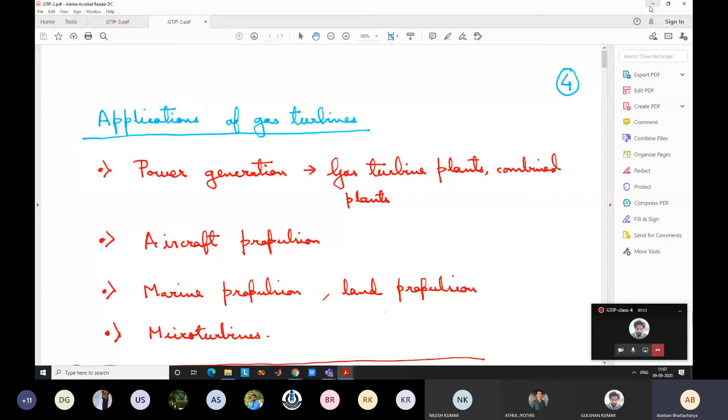So it means that our chance of coming to campus is less this year. At least for now, I am not sure about the next semester. My guess is, or not a guess, most probably, this entire semester is supposed to be online. I think the exams are in December, mid-December or something like that. After that, a decision will be taken. I think results will be out in January, so after that, a decision will be taken based on the situation.

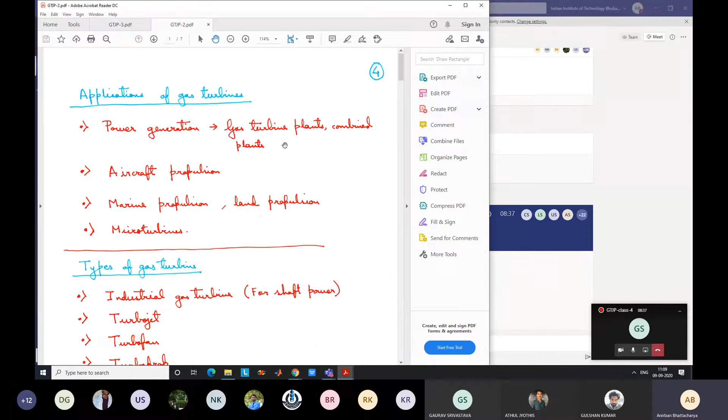I don't know about the lab component. I guess it is going on in online mode, but I'm not sure whether some part of the lab will be done here or not. Last year, students had to manage with only online mode, which is not ideal for lab classes. For our theory classes, it is okay. The only problem is the online exams, which are not useful. But if there is no other option, we also have to do it like that.

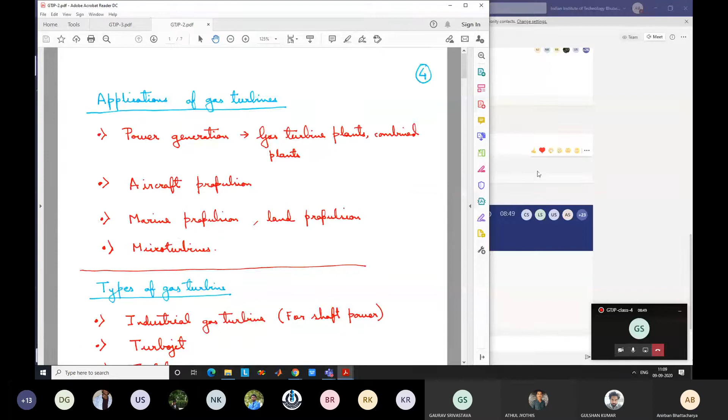Sir, about the recorded lectures. Yes, I have to manage some time to send them. Could you download them yourself? Are you able to download? Have you checked? Sir, we are able to download, but the files are too big. The same thing will happen in my case also. When I send you the link, that issue will be there, right? If you want to see the video lectures, you will need some data.

Sir, you could upload it to YouTube, then they can stream it online. You can obviously stream it online, and I will upload it to YouTube, but you will still require data for watching on YouTube. But that will be lesser than downloading, sir. Okay, because the file sizes are not so large. One hour of lecture is around 150 MB only, quite optimized. Two hours are around 200-300 MB. But anyway, I will upload because you can then watch at lower resolutions also.

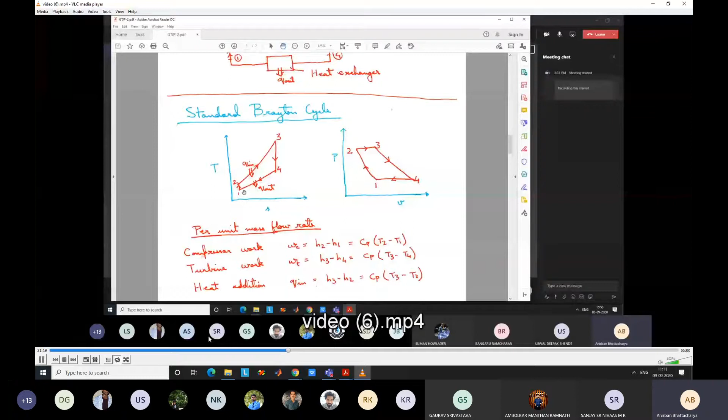This is from the previous class, so I have the videos downloaded. I will upload them. I could not prioritize this over other work. I should create an account. I don't want to do it from my official account, because I don't know the institute policy on this. Better to do it from another account.

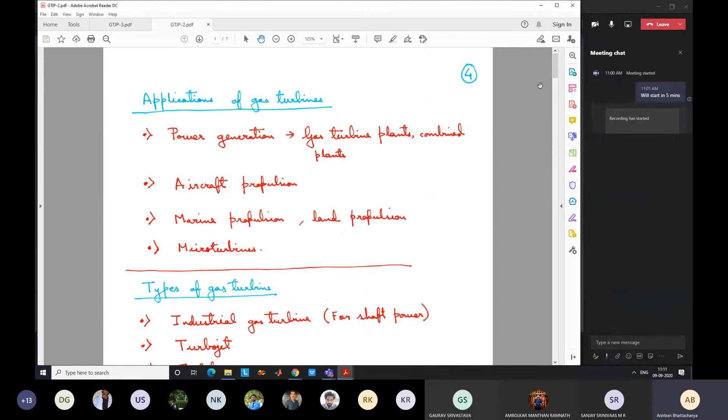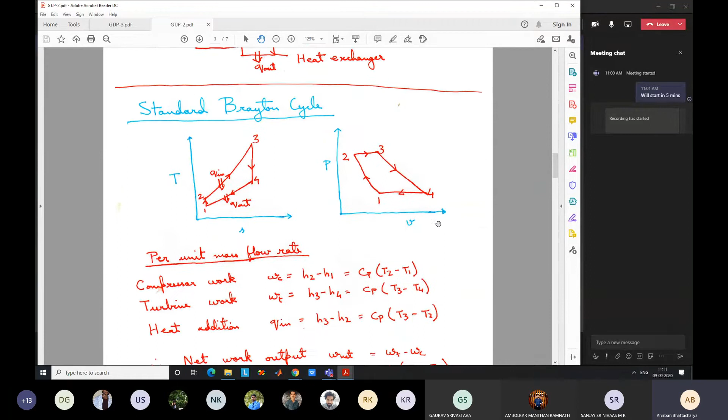So how much had we discussed? I think we were towards the end of the simple Brayton cycle. I will quickly recap once. We were discussing the standard Brayton cycle, which is the most basic cycle for gas turbine applications. We have discussed that in actual gas turbines, in all cases, the working fluid is air at the inlet and it is available in unlimited quantity.

The cycles are open cycles, not closed cycles, because you just bring in more and more air and use it for combusting the fuel, and then pass the hot mixture to the turbine for expansion and get work out of the turbine. Then, depending on the type of gas turbine, we either design the turbine in such a way that the full work is required for running the compressor.

So in that case, the only requirement of the turbine is running the compressor, and the rest of the fluid also has a lot of enthalpy after the turbine, which is used in the nozzle for generating velocity and used for jet propulsion purposes. And we have discussed that for industrial gas turbines, the turbines are larger in size, so that only part of the work is used up by the compressor. The rest of the work is transferred by the same shaft to a generator and used for generating power.

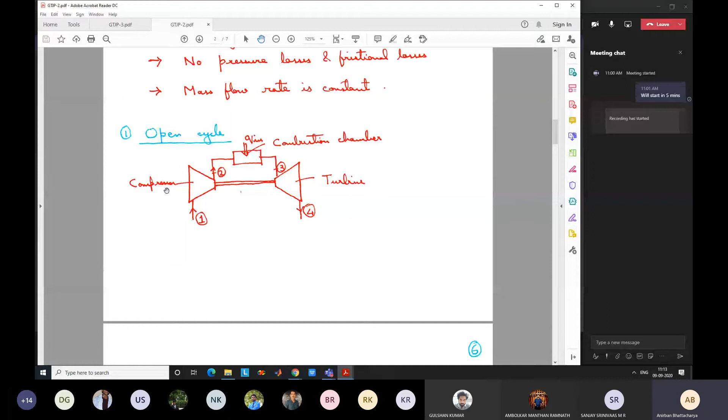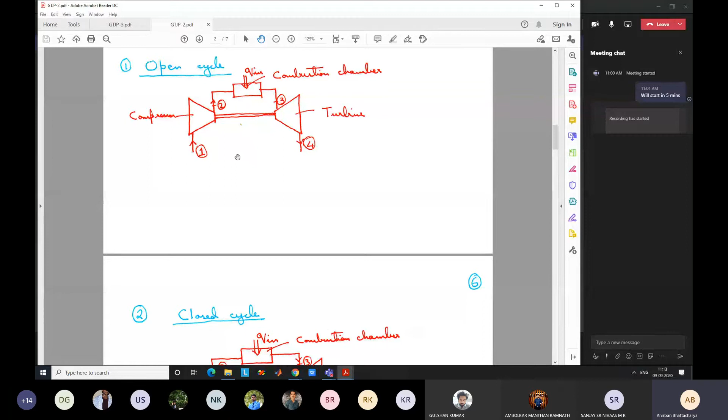And to study this cycle, actually we close this cycle, this 4-to-1 point, using a heat exchanger. Basically, the pressure at 4 and pressure at 1 are the same. Both are at atmospheric pressure, at the local atmospheric pressure, at the point where the engine is operating. So for closing the cycle, the only difference at 4 and 1 is that the temperature at 4 is quite high as compared to 1. So if you have an artificial heat transfer process here, you can close the cycle. So as a result, we close the cycle using a heat exchanger artificially, as if the temperature goes down from 4 to 1.

And after closing the cycle, the 4 processes, if we put them together, give us the standard Brayton cycle. That also we have discussed. And this is how the standard Brayton cycle looks. We have 4 processes: 2 isentropic processes, 1 to 2, which is the compression in the compressor, and 3 to 4, the isentropic expansion in the turbine. And 2 constant pressure processes. From 2 to 3, we have the constant pressure heat addition, which occurs in the combustion chamber or burner. And from 4 to 1 is the constant pressure heat removal, which occurs in the heat exchanger.

If it is an open cycle, we will only have 1 to 2, 2 to 3, and 3 to 4, and this cycle will stop there. This point 4, as you can see, is much above the point 1, which means that it has a higher temperature, although they are on the same constant pressure line. These 2 lines are the constant pressure lines.

The same thing can be drawn in the PV diagram also, and we have seen how it looks. So 1 to 2 is the isentropic compression, and pressure goes up. This is an isentropic line. 2 to 3 is a constant pressure line, so pressure remains the same. Because the temperature increases, the volume also increases proportionally. And 3 to 4 is isentropic expansion, and 4 to 1 is again constant pressure heat removal. Again, because the pressure remains the same but the temperature changes, the specific volume also changes proportionally, because PV is proportional to RT.

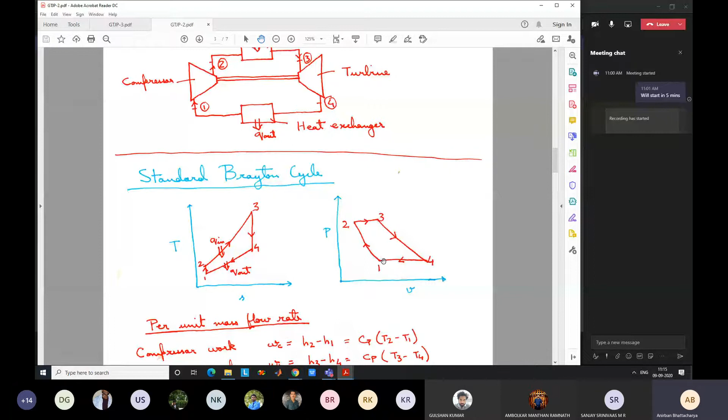And we have seen how to calculate the net work output. These are very trivial. All of you have done this in your previous courses, so just to get you a start, we are going through this again. So W net is W turbine, the work output of the turbine, minus the work of the compressor. Using ideal gas, assuming constant Cp, we can write in this form: Cp (T3 minus T4) minus Cp (T2 minus T1). Please remember that there may be a lag between my voice and the cursor movement that you see on your screen. There is sometimes a big lag also. So I may be showing somewhere on the screen, but you may see something else. So you have to bear with that.

Then we have calculated the efficiency, where efficiency is W net by Q in, a very standard definition. All of you have used this in thermodynamics for any heat cycle. This is the definition, and by suitable simplification, we found that ultimately the efficiency can be written only in terms of the pressure ratio R, where R is P2 by P1, the pressure ratio across the compressor, and this is the same as P3 by P4, the pressure ratio across the turbine.

So remember, we are studying shaft power cycles right now, or industrial gas turbines. So the pressure ratio across the turbine is the same as the pressure ratio across the compressor. This will not be the case for jet engines when we study them later. The compressor pressure ratio will be higher and the turbine pressure ratio will be lower, because the entire expansion will not be done in the turbine. Some of the expansion will be done in the nozzle. But in this case, both the pressure ratios are the same for the compressor and the turbine.

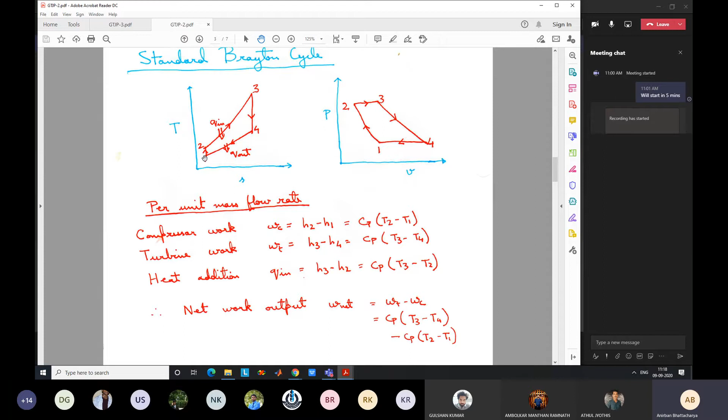Obviously, at a pressure ratio of 1, what happens? Pressure ratio of 1 means that there is no difference between 1 and 2. There is no compression. So basically, there is no cycle at all. So no work output. Okay. And from there, it keeps on increasing, slowly. For very large values of R, it will go towards 1, but still it will increase very slowly. Okay. It can never reach 1, of course, that is true.

And typical values of R nowadays are around 20. Initial gas turbines had very low pressure ratios. Initial jet propulsion engines had 2, 3, 4 like that. But nowadays, typically, it can go much higher.

And we have seen towards the end of the previous class also that the second important parameter for analyzing the cycle is the non-dimensional net specific work output. Non-dimensional, why? Because we are dividing the work by a similar quantity, C_p T1, the inlet enthalpy. So it makes this non-dimensional. And net work output, because it is the net work, turbine work minus compressor work, and specific work output because it is per unit mass flow rate.

Okay, so it is non-dimensional net specific work output. So this we have seen that we can write it as a relation which looks like this: T (1 minus 1/C) minus (C minus 1) where T is the temperature ratio. T is known as the temperature ratio, T3 by T1. Again, I will go back to the cycle. T3 is the maximum temperature in the cycle. T1 is the minimum temperature in the cycle.

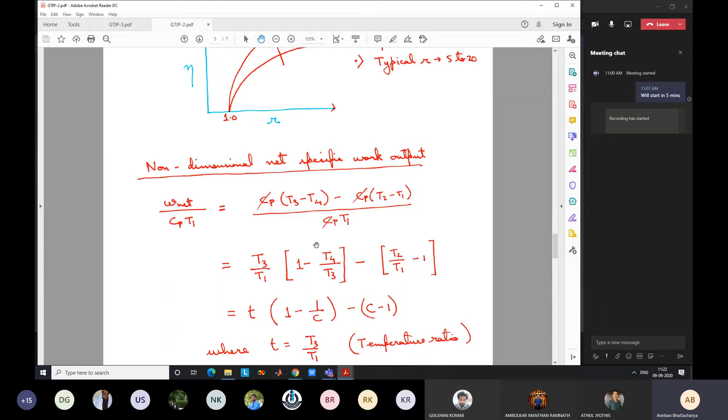This is important because, keeping the efficiency same, or for similar efficiency, if you have more specific work output, you need less mass flow rate of air for generating the same amount of total power. Okay, if the specific work output is more, for the same total work output, you will need less mass flow rate, and as a result, because all the components scale with the mass flow rate of air, all the component sizes will be much reduced, like the compressor's diameter, turbine diameter, everything will be reduced, combustion chamber sizes, and it will be lightweight. This is very important for jet propulsion cycles, because weight becomes a very important criterion in aviation. Okay, so you want to reduce the weight as much as possible.

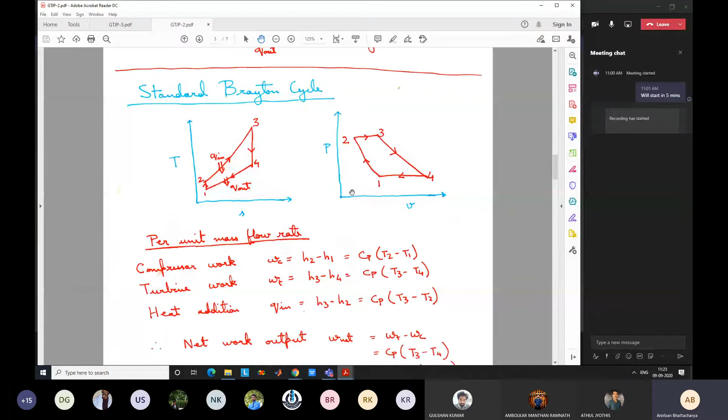So I hope up to this point everything was clear in the previous class. We have also seen one example calculation of the point at which the net work output goes to 0 for the T equal to 2 case, and we found that this happens when R is equal to 11.31. And remember that for R equal to 1, anyway it is 0 because the work output is 0 at that point. Okay, the cycle does not exist.

Then we have a very long, constant pressure heat addition process, because we have to go till T3 temperature. So from T2 to T3 is a very long distance. And again, the pressure ratio across the turbine is very small because R is very small. So small pressure ratio across the turbine, and then again a very large heat rejection process. So this is the shape for R very near to 1 or a very small value of R. Okay, and you can see that the cycle area actually gives us the net work output, net heat addition, which is also equal to net work output. You can see that the net work output will be quite low. And in the limit that R goes to 1, we will see that T1 and T2 coincide and the cycle basically becomes just like a line. Okay, so you don't have any work output.

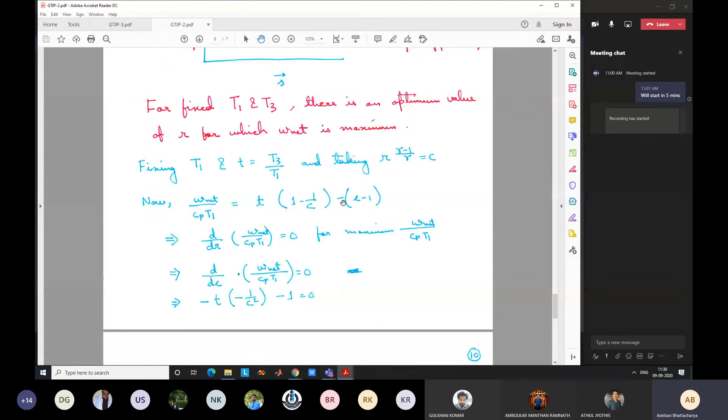If you do that, the first term goes to 0. The second term, minus T by C, differentiating with respect to C, gives minus T minus 1 by C square. The third term gives minus 1, and the final term is 0, constant. So you get the equation T by C square minus 1 equal to 0, from which C is equal to root over T.

C is equal to root over T, and remembering that C is R to the power gamma minus 1 by gamma, we can write R is equal to T3 by T1 to the power gamma by 2 gamma minus 1. So this is the optimum value of pressure ratio for which we get the maximum work output.

The physical meaning of this will be clear if we try to find the optimum temperature instead of optimum pressure ratio. Remember C is equal to root T, or C square is equal to T. What is C? C is the temperature ratio T2 by T1. T2 by T1 is R to the power gamma minus 1 by gamma, which is equal to C.

Similarly, C is also equal to T3 by T4. So temperature ratio across the compressor and temperature ratio across the turbine are both equal to C. Coming back to this expression, C square we can write as T2 by T1 into T3 by T4, and small t is the temperature ratio T3 by T1. If you cancel out T3 and T1, you are left with T2 equal to T4.

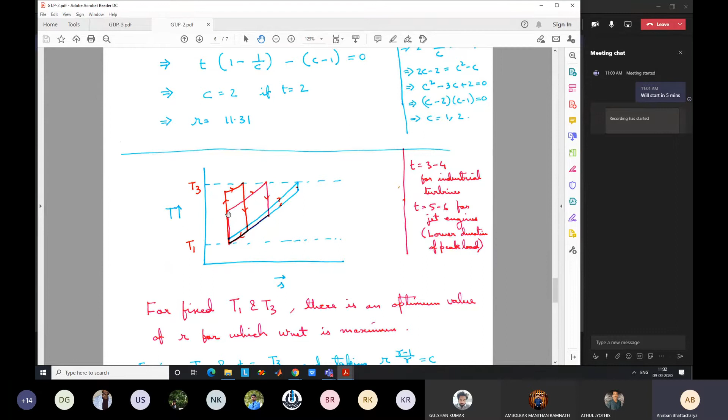So at the optimum condition, in terms of maximizing work output, we see that the maximum work output occurs when T2 is equal to T4 - this point and this point are at the same height. If we go back to the cycle T-S diagram, if points 2 and 4 are at the same height, meaning the same temperature, you get the maximum work output from this cycle for a given value of T.

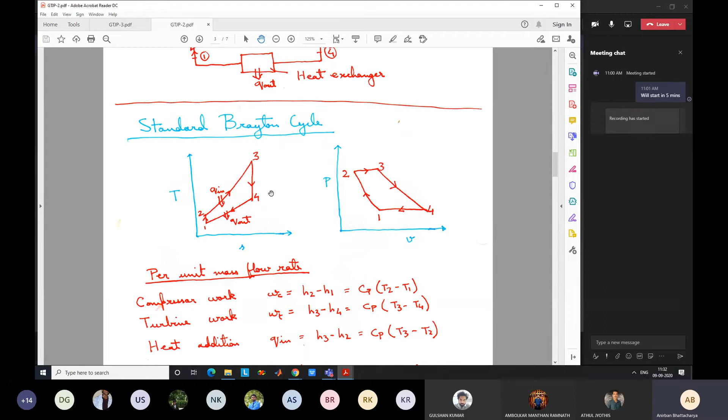Okay. So also it means that from this where is it? No, it's fine. Okay. So this is

It does not mean we have to operate at this point, because efficiency is also important, and efficiency at this point is not maximum - efficiency will increase with increasing value of R. But if we want to maximize the work output, we have to go with this condition.

So any questions up to this? This is just about the simple cycle. Then we will go with some modification of the cycle - some modification of the simple gas turbine cycle, which is also called the Brayton cycle.

So the first modification is regeneration. We want to increase two things: one is the efficiency of the cycle, second is the net work output from the cycle, net specific work output. These are the two things we want to increase. Regeneration is a process which can be used for increasing the efficiency - it will not help in increasing the work output, but it can cause an increase in efficiency.

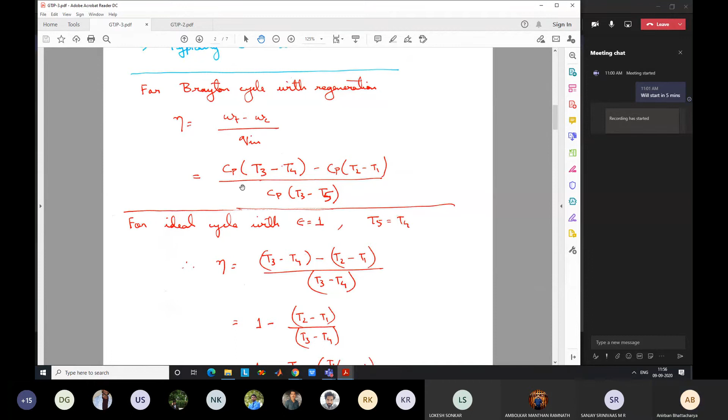So now eta is equal to 1 minus (T2 minus T1) by (T3 minus T4). You can simplify this. Take T1 and T3 out, so you get T2 by T1 minus 1 in the numerator, and in the denominator, 1 minus T4 by T3. What is T2 by T1? It is the temperature ratio across the compressor, which is R to the power gamma minus 1 by gamma. So R to the power gamma minus 1 by gamma is C.

We have discussed this, so this is C minus 1. And what is T4 by T3? Remember T3 by T4 is R to the power gamma minus 1 by gamma, the temperature change across the turbine. So T4 by T3 is 1 by R to the power gamma minus 1 by gamma, which is 1 by C. If you take C as common from the numerator, both numerator and denominator cancel each other, and you're left with 1 minus C by T. In other words, efficiency equals 1 minus R to the power (gamma minus 1 by gamma) by temperature ratio T.

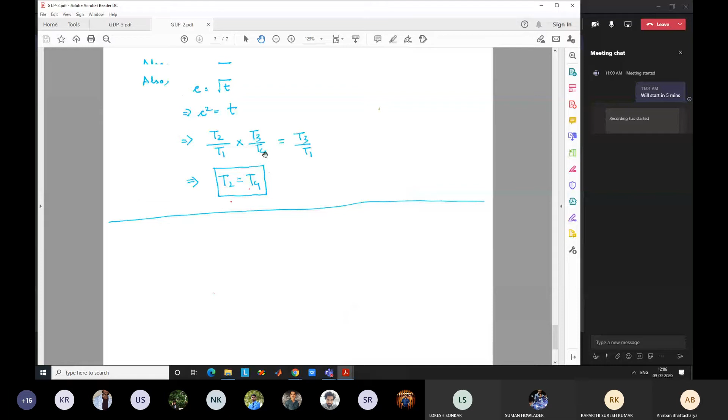Someone was replying, right? When we have high pressure ratios, T2 reaches higher than T4. Yes, correct. When T2 is higher than T4, if we have a high pressure ratio and keep on increasing it, T2 will keep on increasing, as we have seen in the previous case. And at some point, keeping the temperature ratio T3 by T1 constant, if we keep on increasing the pressure ratio, T2 will go beyond T4. At that point, you cannot effectively transfer the heat, because now we were trying to transfer heat from this exhaust gas to this part.

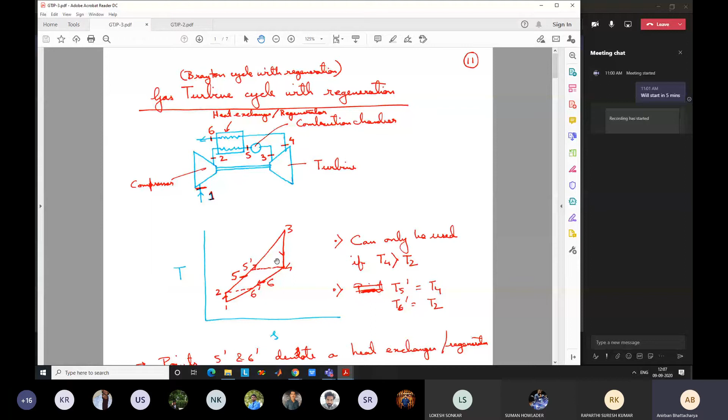But for some part of the heat exchanger, the opposite thing will happen, meaning the heat flow direction will become opposite. It will actually negatively affect the heat exchange process, so the heat exchanger is not effective. So the condition for a regenerator to be used is that T4 should always be higher than T2, and the limiting case is T4 equal to T2. If T4 is not higher than T2, we cannot use a regenerator. This is clear from this diagram, and this is also why this effect has happened here.

It should be less than the optimum pressure ratio for a regeneration process. Optimum meaning in terms of maximum work output. Yes. If you want to increase the efficiency, work output is not the only important parameter, right? Efficiency is also very important. Yes, it has to be below the maximum work output limit.

What is happening to the work output in this cycle compared to the simple Brayton cycle? Is it changing? It will be lesser now, because T2 and T4 are far apart, so specific work output will be lesser. Why is it lesser? Sir, work output will be maximum when T2 and T4 are at the same level, right? But T2 and T4 can't be at the same level — not in the optimum case. I am saying that for the exact same temperature and pressure ratio, say somewhere around here.

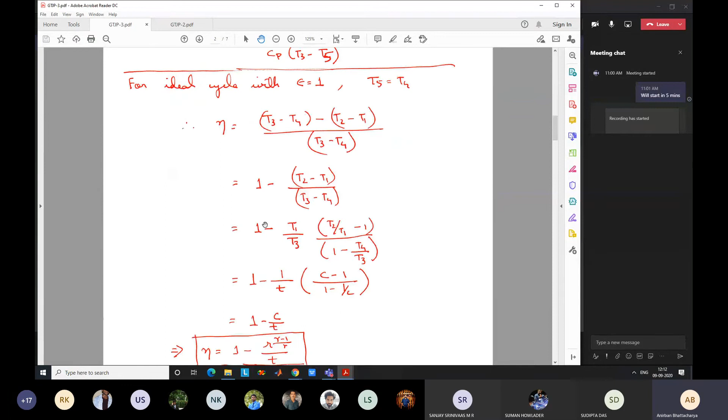We will have a higher scope of regeneration if the temperature ratio increases — regeneration is more effective when the difference between T4 and T2 is higher. I hope this is very clear. So if you keep increasing the difference between T4 and T2, you can have more effective regeneration. One way to do it is to increase the temperature ratio by improving materials, for a fixed pressure ratio — that gives more scope of regeneration. That's why our earlier result showed more T gives more efficiency, for a fixed R. And the other case we've already seen: if we keep T fixed, meaning T3 by T1 fixed, and keep increasing R, then T2 increases, the difference between T4 and T2 decreases, and we get less scope for regeneration.

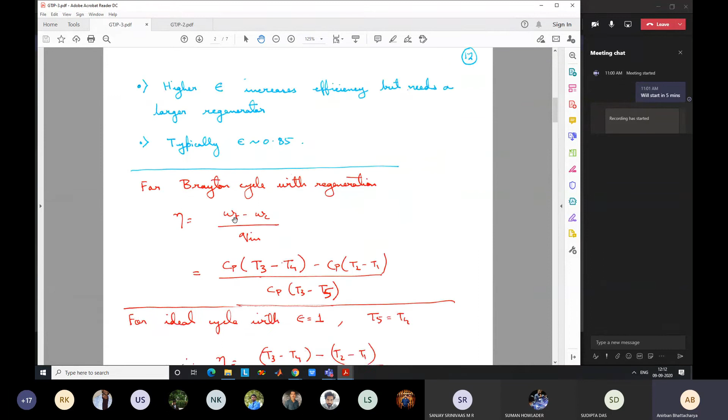Okay, so increasing R decreases the scope of regeneration. So that's why these two conditions are present. Okay, how T and R affect.

And I have discussed that at R equal to 1, eta is equal to 1 minus 1 by T. This is similar to the Carnot cycle efficiency. Okay, 1 minus 1 by T is 1 minus T1 by T3. T1 is the minimum temperature in the cycle. T3 is the maximum temperature in the cycle. So at the limiting case of R equal to 1, we get 1 minus T min by T max, which is the Carnot cycle efficiency for a given temperature range.

Obviously, we cannot achieve that because in that case there will be no work output. Pressure ratio is 1, so no work output. So the theoretical limit of a regenerative cycle is that we get Carnot cycle efficiency. So we want to find out what this is. I have described this, and you have taken my word that at these points T2 equals T4. But we want to mathematically see that yes, T2 is equal to T4 at that point.

Okay. So say C is equal to root T. Then T is C square, so eta can be written as, so what is eta? Eta was 1 minus C by T. So I can write this as 1 minus C by C square, which is 1 minus 1 by C, which is 1 minus 1 by R to the power (gamma minus 1) by gamma. What is this value? This is equal to the simple Brayton cycle efficiency. So for C equal to root T, we get the simple Brayton cycle efficiency.

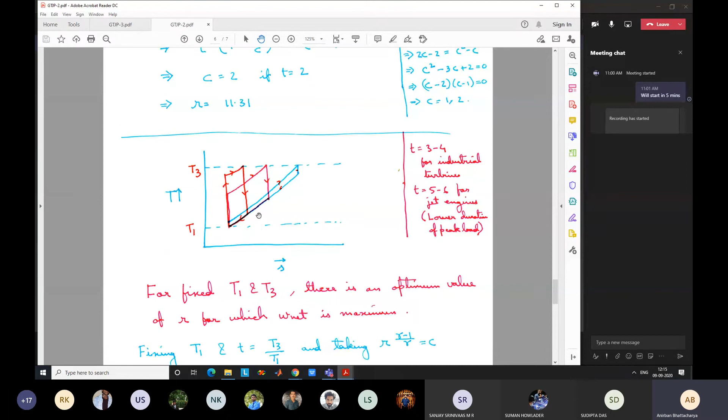We have seen, let me just keep it here. This scrolling is difficult for you, I understand. I quickly scroll. We have limited space here. We had seen for the simple Brayton cycle today at the beginning of the class that for C equal to root T, the condition T2 equal to T4 is satisfied. Okay. So C equal to root T means T2 equal to T4. So the same thing we are seeing here. So for C equal to root T, both the efficiencies become equal. It means that for T2 equal to T4, regenerative cycle efficiency is equal to simple Brayton cycle efficiency. It means that the blue line coincides with the red line.

And obviously, if you increase the value of T, C equal to root T occurs at a higher value of C, meaning at a higher pressure ratio. You can go to a higher pressure ratio for the regenerative cycle. Okay. Typically, what we do is operate at a point which is slightly below this maximum work output point. So the pressure ratio is slightly below this maximum work output point, the optimum point, so that we get good efficiency and good work output also.

And these are typically only done for industrial gas turbines. As we will discuss later, for jet engines, weight, the mass of the engine, is a very important factor. So we don't want to add additional components like regenerator, reheater, intercooler for aviation engines, because it will increase the weight and reduce the fuel economy. So in those cases, we just go with the simple Brayton cycle, but with a high temperature ratio, so that we directly get a high efficiency. Okay. But for industrial gas turbines, where weight is not a very big issue, we can add these extra things.

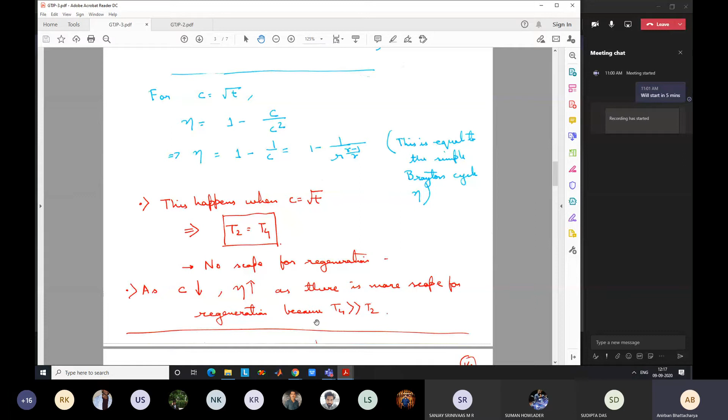Regeneration. So this happens when C is equal to root T and there is no scope for regeneration. Okay. And we have already discussed that as C is decreased, so as R is decreased, eta increases as there is more scope of regeneration, as T2 becomes much less than T4.

So finally, to summarize, for regeneration cycle, efficiency increases while net specific work output remains the same as compared to Brayton cycle. Any questions on regeneration cycle, ideal regeneration cycle? We will see real regeneration cycles later on, but now we are focusing on ideal cycles.

Sir, we need to practice numericals also for these questions. Correct, and I will also solve a few cases here, and I will give you some sets for solving. So, for example, I think I have sets already prepared.

So I will give you some assignment sets, and you can solve those problems. I will give you the solutions also, so that you don't have to bother with the marks. You just solve them on your own. Try to solve them without seeing the solution, and then compare with the solution.

And for each case, for this ideal cycles, a few problems, like this. But I can only give a few problems because I cannot generate a lot of problems, a very large amount of problems. It takes a lot of time.

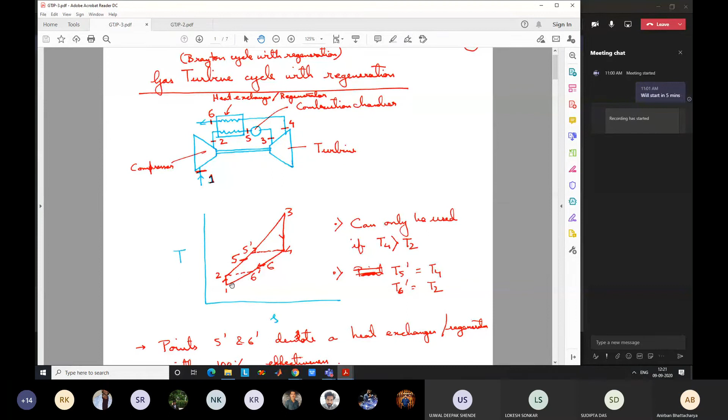At the limiting case when R is 1, you cannot draw the cycle. It's the theoretical limit of the efficiency, but the theoretical limit does not always need to go to infinity or 1. Here the theoretical limit is equal to the Carnot cycle efficiency. But actually what will happen—if R is 1, this line will just coincide, meaning 1 to 4 and 4 to 1. So there is no area inside the cycle.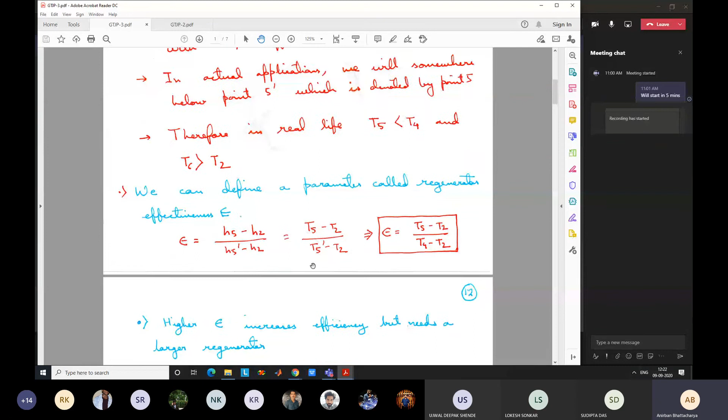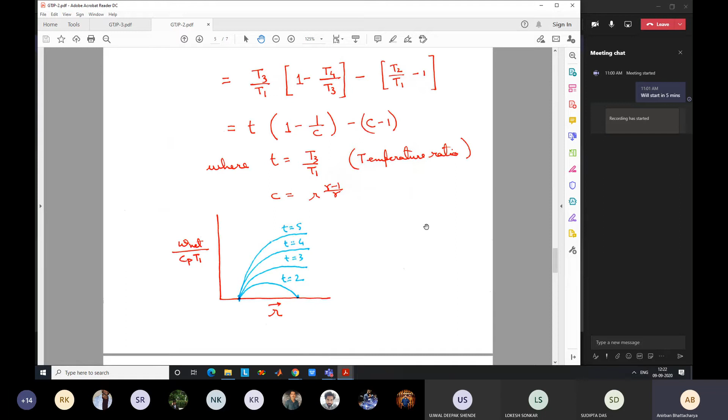So we cannot get any work output. Work output, the lines I have not shown you—I have only shown efficiency versus R. In the previous case for simple Brayton cycle, I have shown both types of lines. I have not shown the work output lines here because the work output lines are exactly the same as simple Brayton cycle, so these lines will coincide. There is no difference—for t equal to 2, 3, 4, 5, they will coincide.

Is it clear? Okay, sir. Yes, it's just a theoretical limit. Okay, in the actual case, that cycle cannot exist. But the theoretical limit is a finite value.

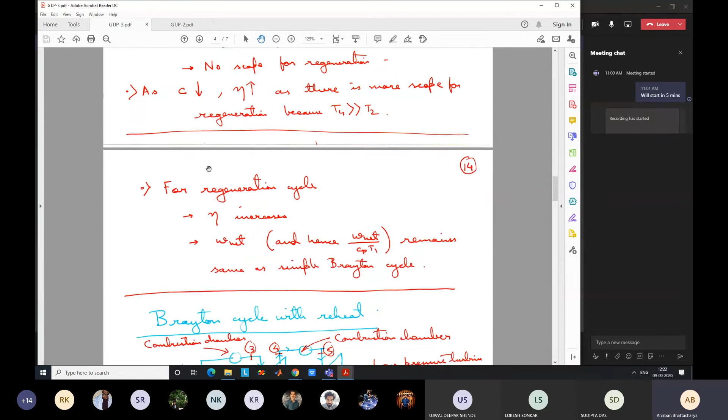It can happen in maths also. There are a lot of interesting things where limits go to a finite value, like there are some types of volumes—actually this is just not related to the course, but you can take a look, some interesting cases.

Sir, I think the expression of work will have some 0 by 0 form at R equal to 1, and that is not visible in the efficiency part. Yes, yes. You cannot use the normal equation at that point, at the limit—you cannot use net work output by heat input directly, but you have to take a limit. If you do the limit, you will see that you actually get some limiting value. Limit R tends to 1—if you find the limit, you will get a limiting value.

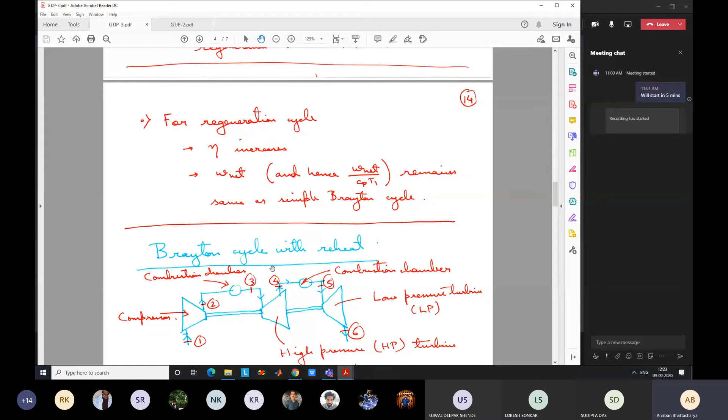See, remember that in maths there are a lot of examples with 0 by 0 limiting values, like some expressions, say sin x by x. If x goes to 0, sin x also goes to 0, but the limiting value does not go to 0. In a lot of cases the limiting value is a finite value, even if both the values go to 0. Similarly, in this case also it can happen. So limit sin x by x equals 1. In this case also something like that can happen, so you have to find the limit for that case.

So anyway, the next type of modification that was developed for the Brayton cycle, next not chronologically but in terms of studying, that we can consider is adding reheat. Again, the concept of reheat is not new to any of you. You have studied regeneration and reheat both in steam turbine cycles, in power plant engineering or steam turbines, depending on the courses that you had in undergraduate. So the same is the concept of reheat here also.

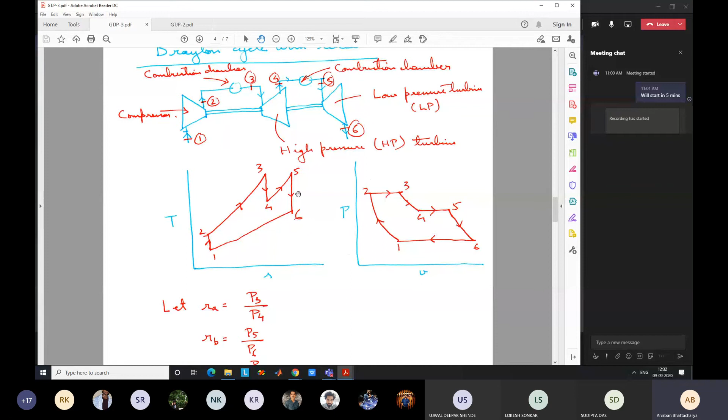So what will be the cycle area as compared to the new cycle area? The cycle area for the simple cycle will be less as compared to the reheat cycle. So if the cycle area is less as compared to the reheat cycle, it means that the reheat cycle has more net work output, right? More net specific work output. So the main purpose of adding reheat is to increase the net specific work output.

If you think carefully about the efficiency from the TS diagram, you will notice, or you have to think carefully, after the class, you think about this. Actually, the efficiency will be reduced. Just by looking at the cycle also, we can say that actually the efficiency will be reduced as compared to the previous case. You think about why it will happen. This addition of this new part actually causes some loss in efficiency. Without going into mathematics also, just by understanding the cycle, you can understand why this will be happening. You just think about it after the class.

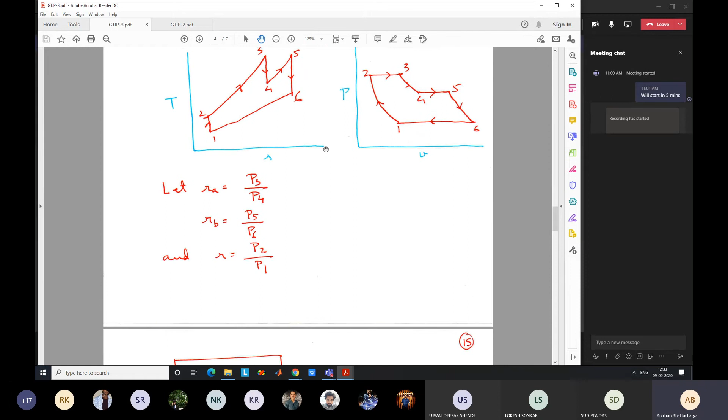Let us analyze this cycle a little. So now we have two pressure ratios. One pressure ratio is P3 to P4. So let us call this pressure ratio RA. And the second pressure ratio is from P5 to P6. Let us call this pressure ratio RB. And the overall pressure ratio is P2 by P1, whatever we give in the compressor, which is equal to R. What is the relation between R and RA, RB?

R should be equal to RA into RB, because what is the value of P3? P3 is equal to P2. And what is the value of P6? P6 is equal to P1. And P4 equal to P5. You just multiply RA into RB. You get P3 by P4 into P5 by P6, which is equal to P3 by P6, which is equal to P2 by P1. So R is equal to RA into RB. Just practice this after the class. So these two turbine pressure ratios are related to the overall compressor pressure ratio in this form. R is equal to RA into RB.

If we define C as R to the power (gamma minus 1) by gamma, equal to T2 by T1, which we have already done previously, we can similarly define two more temperature ratios. The temperature ratio across the first turbine is CA, which is equal to RA to the power (gamma minus 1) by gamma.

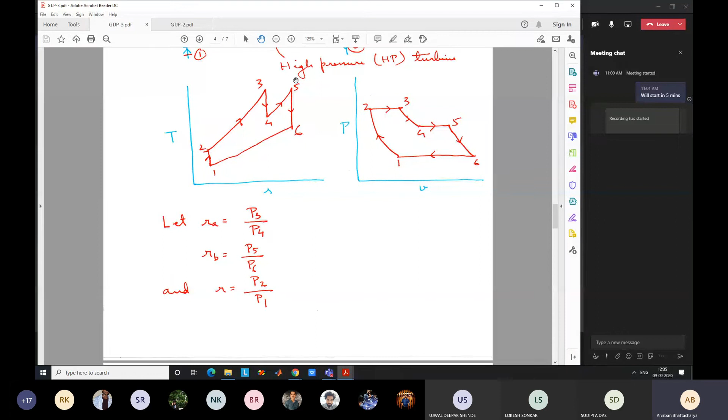RA to the power gamma minus 1 by gamma is T3 by T4. What is RA? It is P3 by P4. So P3 by P4 to the power gamma minus 1 by gamma for the isentropic process gives us T3 by T4. Similarly, for the isentropic process, P5 by P6 to the power gamma minus 1 by gamma gives us T5 by T6.

So CB is equal to RB to the power gamma minus 1 by gamma, which is equal to T5 by T6. Since C is equal to CA into CB, why? Because R to the power gamma minus 1 by gamma is equal to RA to the power gamma minus 1 by gamma into RB to the power gamma minus 1 by gamma. From this relation, C is equal to CA into CB. So temperature ratios are also related.

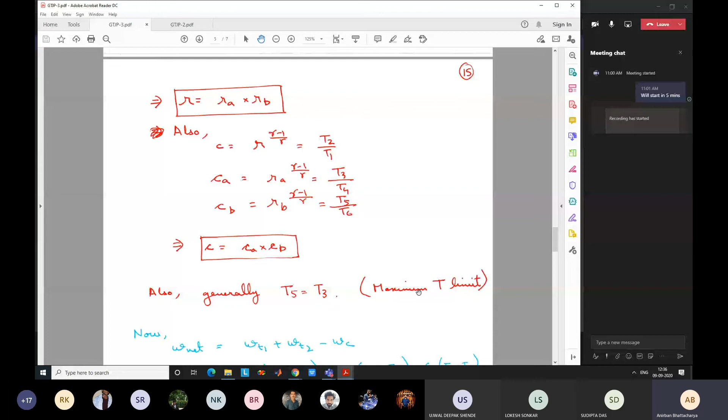And we have also discussed that typically we assume T5 to be equal to T3, which is the maximum temperature limit or the material limit of the turbine blades. So with this, now we can analyze the cycle.

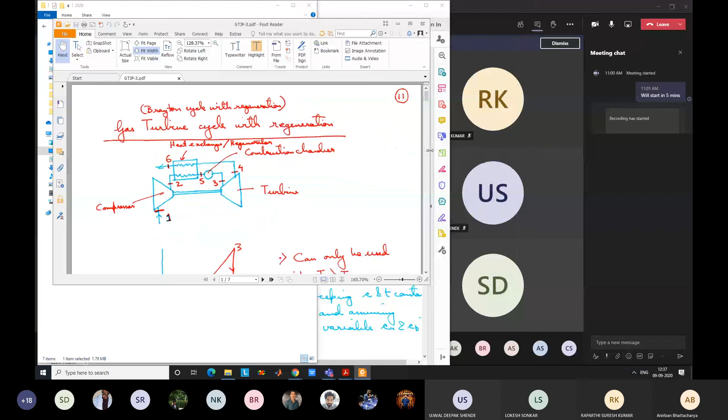Again, I cannot show you the diagrams parallelly. Or can we show it side by side? Can I open another instance of this? It will do the same thing. So you can open with Chrome. Yes, I can do that. It is easier if there is a big board and I can show a lot of things side by side. Or some other PDF thing is also fine, right? The size will be slightly smaller, but I want to show you side by side.

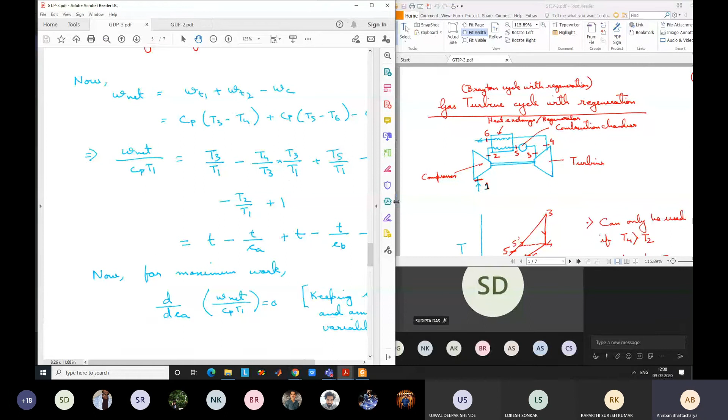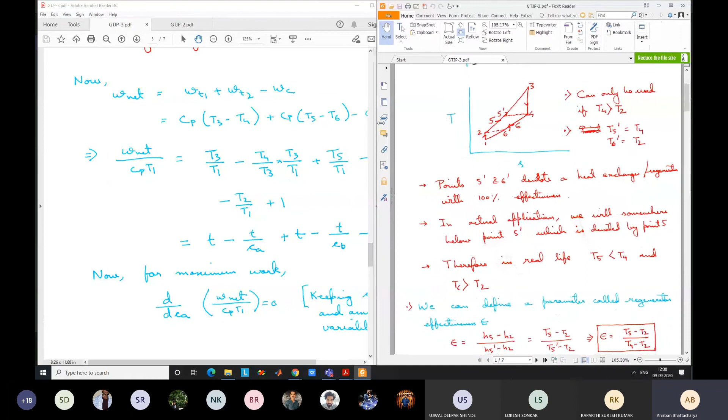Otherwise, I am just randomly saying T1, T2, T3, T4, and there is a disconnect. You will not remember what T1, T2, T3, T4, T5, T6 are randomly, though I remember because I have done this so many times. So we should always keep the cycles open whenever we are doing some discussion. Otherwise, it becomes difficult. On the board, I always draw the cycles and keep them drawn whenever some discussion is going on. We'll continue like this for the next few classes. Now it is better, if you can see the cycles.

So T5 equal to T3 we generally keep, and T3 by T4 multiplied by T5 by T6 is equal to T2 by T1. And that also is established, and P2 by P1 is equal to P3 by P4 into P5 by P6. All this we have established just now.

So what is the net work output from this? There are two turbine work outputs, assuming constant CP again, because till now we are only going through ideal cycles. CP into T3 minus T4 is the first turbine work output. CP into T5 minus T6 is the second turbine work output. So total work output is CP into T3 minus T4 plus CP into T5 minus T6 minus the compressor work input, which is CP into T2 minus T1.

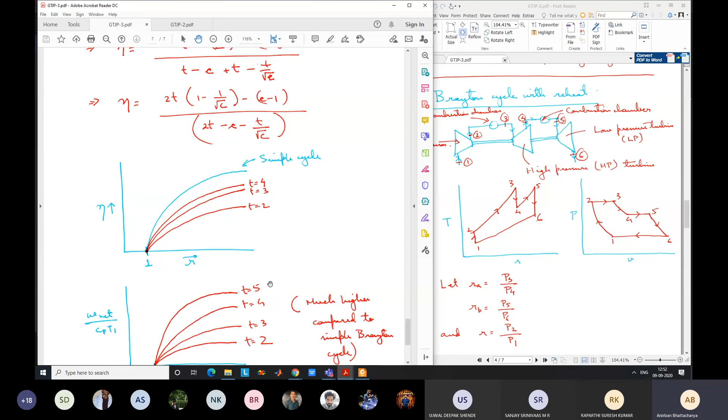So by adding reheat, you are losing efficiency, but you are gaining net specific work output. So in real life, only reheat is not used. Generally we combine it with regeneration so that we get both high efficiency and high work output, which we will study in the next class. But for only reheat, this is what happens to the efficiency curves. With increasing value of T, efficiency increases, and with increasing R also efficiency increases, but it is always less than simple cycle efficiency.

What about this net specific work output? Also we can plot from, yes, question?

The net specific work output also we can plot from that complicated expression at the maximum condition, optimum condition. Optimum means only because optimum in terms of CA and CB, assuming that T4 equal to T6 and T3 equal to T5. Other things are varying, means R is varying, so C is also varying. Pressure ratio can vary and T can also vary.

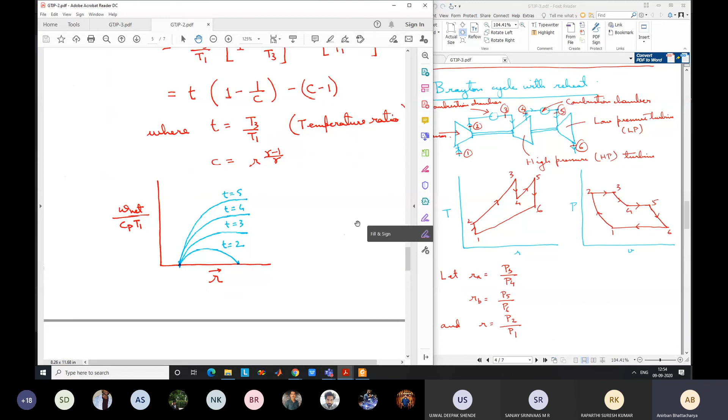So if you plot it, it will look similar to the case of the simple cycle. See, it is similar to the simple. Here. This is with the reheat. This is the simple cycle.

This will look somewhat similar, but in actual case, if you just overlap them, these lines are much higher as compared to these lines. So in actual case, the work output is much higher as compared to simple Brayton cycle. So this T equal to 2 line is much higher than this T equal to 2 line, if we compare them and plot them in the same graph. So qualitatively, they look similar. So work output actually increases. That can be easily seen from the cycle area.

Okay. So to summarize the effect, the net specific work output increases, net work output also increases, obviously, but the efficiency decreases by adding reheat. So we have studied two things today. One is the reheat and second is the regeneration. In reheat, the net specific work output increases, efficiency decreases. In regeneration, the net specific work output remains constant, but the efficiency increases. Right? Did I say it correctly? So in reheat, the work output increases, efficiency decreases. In regeneration, work output remains same, efficiency increases.

Okay. So in the next class, we will see a combination of these two, and then we will see another method which is known as intercooling. Instead of reheating, we can also break down the compression process into two separate compression processes using a device which is known as intercooler. You might not have studied this for steam turbine cycles. In steam turbines, we study regeneration and reheat, but there is no concept of intercooling. But here we can also use intercooling, and that also will increase the work output, as we will see later.

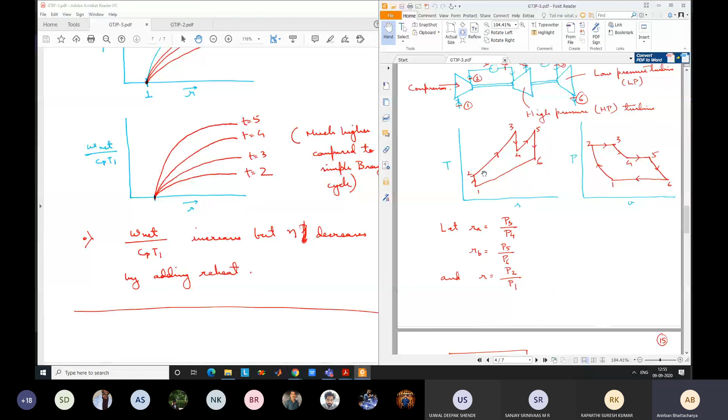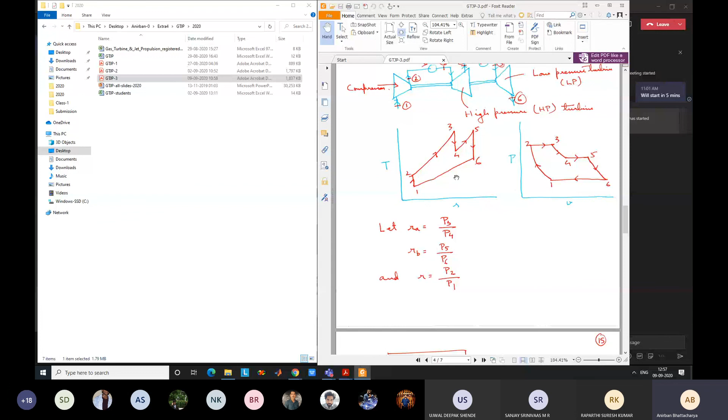Before ending the class, I just want to ask you to just think about how these constant pressure lines look like for any of the cycles in a TS diagram. Do they, as the entropy increases, diverge? Means the difference in temperature for the constant pressure lines increases, or do they remain same or decrease? Can anyone say what happens to these constant pressure lines? Are they diverging towards the right hand side, or does the gap remain same? The way I have drawn it shows that it is diverging, but actually what happens?

Let us go to this. So this constant pressure line, do they diverge, or do they remain parallel to each other, or do they converge towards the right hand side? What happens? They diverge. You can find that thermodynamically using thermodynamic relations. Why do they diverge? You can think about it. It's not part of the course, but you should think about why they diverge.

Okay, but just by looking at the cycle, or just by the concept of the Brayton cycle, we can say that they should diverge. Otherwise, we cannot get any net work output. If they remain parallel, what will be Cp (T3 minus T4) as compared to Cp (T2 minus T1)? T2 minus T1 should be equal to T3 minus T4, right? If they are just two parallel lines, the difference always remains same. So the turbine work output should always be equal to the compressor work input. So we will not get any net work output from the cycle if they remain parallel.

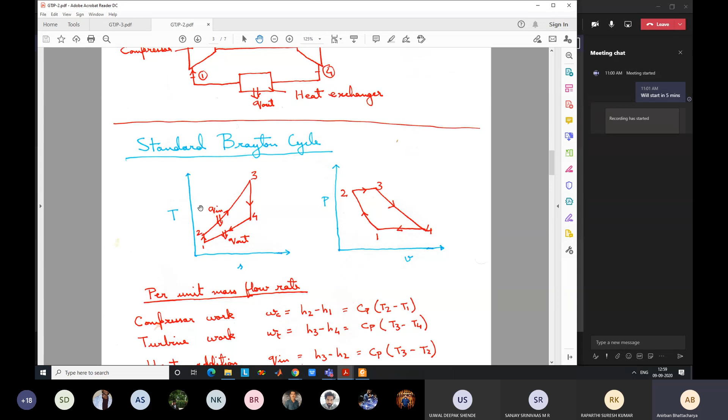And if they converge towards the right hand side, turbine work output will actually be lower than the compressor work input. So the concept of Brayton cycle and power generation cannot be used. Only because the constant pressure lines are diverging, we can draw this cycle. We can generate power using this type of cycle. Otherwise, we would have had to devise some other form of the cycle. So the question still remains: why do they diverge? But we know that they should diverge. Otherwise, this type of cycle cannot exist. Okay. So with this, I will stop the class.